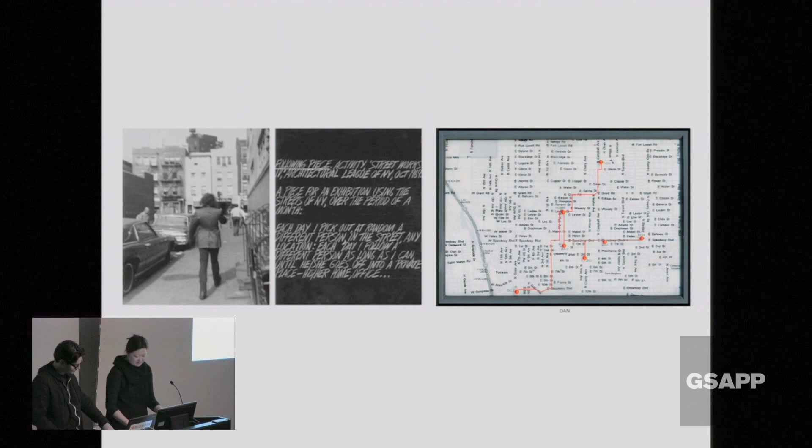One of our favorite pieces is Following Piece by Vito Acconci. In this piece, it's a conceptual art piece where he simply remaps the city by a set of instructions which designate that you should follow a stranger in public space until they enter a private space. This performance is repeated, and it's done in a way which remaps the city and brings to one's attention these limits between public and private. So we're going to show a few really old projects and then some recent projects.

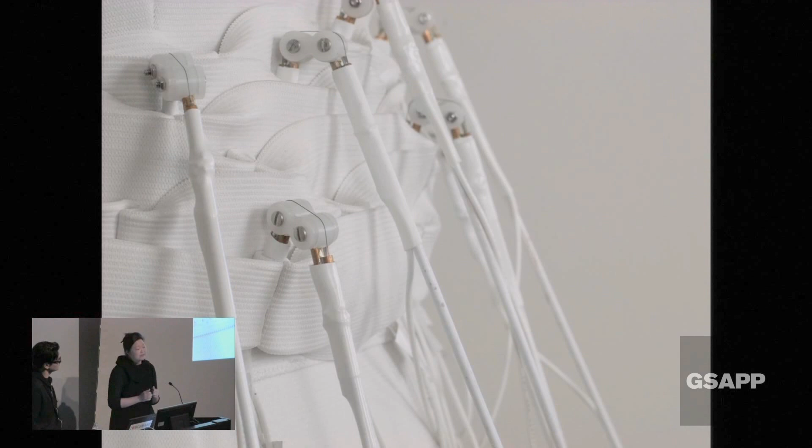The first one is called The Defensible Dress. When I arrived at MIT in 2001 to teach, I was very nervous because MIT has this T, technology, in its name, and I'm very technophobic, a little technophilic, but mostly technophobic. So when I arrived there, I took a course called How to Make Almost Anything, taught at the Media Lab. My final project for the course was this hacked together garment, which you could program your comfort level in terms of personal space distance, and whenever anyone intruded on that space, it would lift up. The medium by which this happened was through soldering and sewing, and I used shape memory alloys, nitinol wires at the time, which when given electric charge and heated, created a contraction, which then created that lever action.

This idea of the public and personal response to space led to, and that technological experiment led to, a project in 2004 called White Noise, White Light. The project was very simple, like the Defensible Dress. The idea was to simply create a field that would respond to the movement of people through that field. It would be indexical, it would emit white light, it would brighten, and white noise. For me, the notion of white was really important in that it dealt with the accumulation of the crowd, accumulation of all colors in spectrum, and all sound within the range of human hearing.

Which you can't hear.

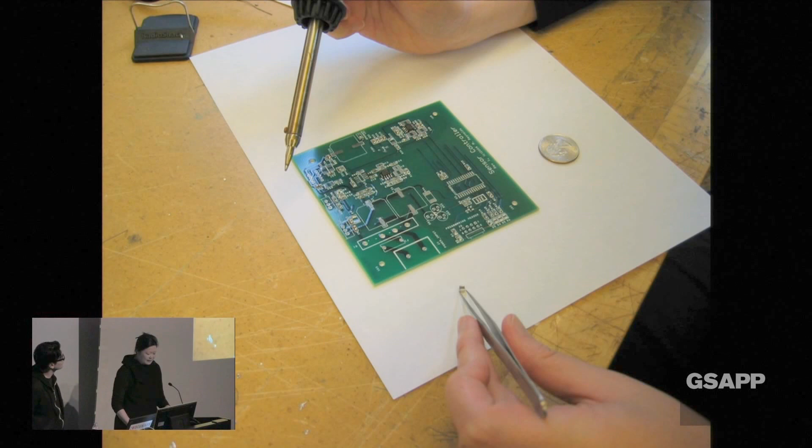Back then, in 2004, we had to solder everything by hand. We were our own sweatshop at the time, putting together 400 of these units, one by one. What was so interesting is that a year later, the Arduino board came out and it was game over, launching this incredible maker culture that we have seen for a decade since.

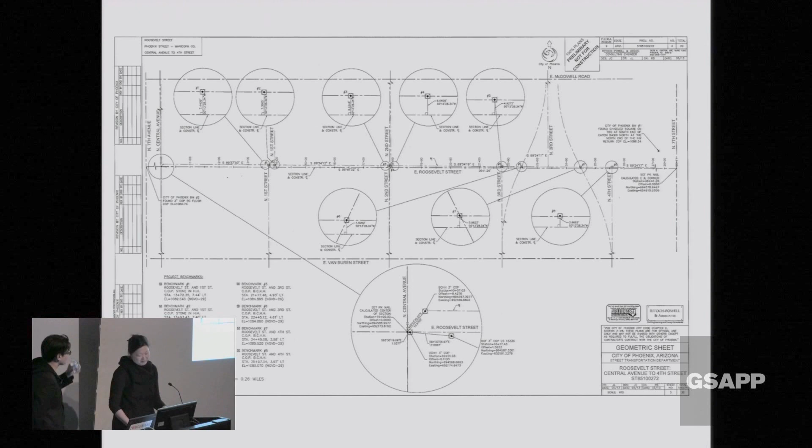In thinking about public space, I think it's always very context specific. We were given an opportunity as part of a transportation project, a Percent for Art program tied to a transportation project in Phoenix, Arizona, where there was a plan to shrink the road and make Phoenix more pedestrian-friendly by adding bike lanes and public space. What was really interesting was we were asked to transform a traffic median into a kind of public space in the context of Phoenix, Arizona, which is a very challenging problem.

But I remembered seeing photographs of this giant flag in Mexico City and how amazing it was that everybody lined up in the line of the shadow of the flag. It seemed that in the context of Phoenix, maybe the most appropriate way, or the most potentially successful way, to create public space might simply be to create shade.

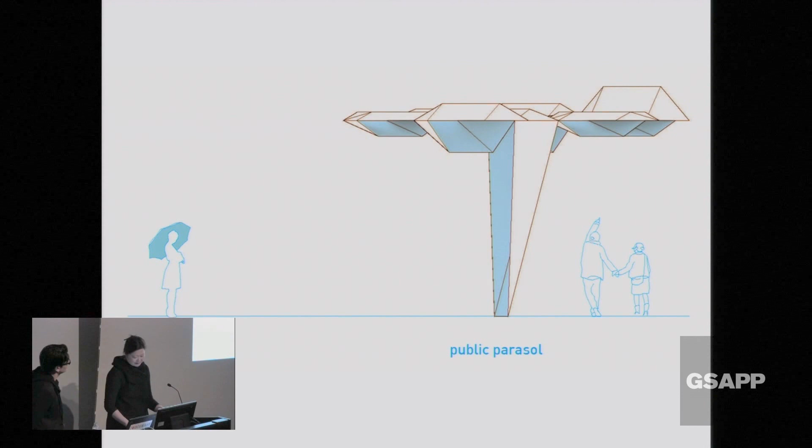So the idea was to take this notion of a private parasol and turn it into a public parasol. The unit was really simple - just a strip folded in on itself like a Mobius strip. But what was important about the unit was that it would create shade, but also shadow, and that the shadow could frame light as it poured through the cell at different times of the day. So it would be a kind of porous shade structure aggregated together.

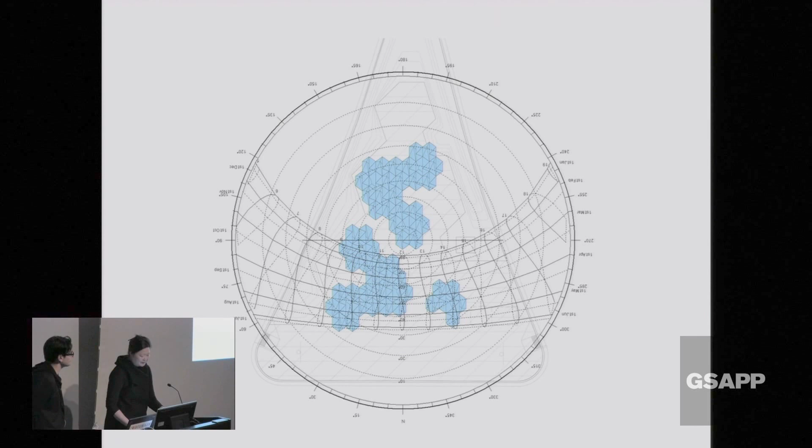The other thing that was critical to it was that it would be responsive to the environment, specifically in the longitude and latitude in which it was sited. So in really hot parts of the day, it's more in shade, and in the cooler parts of the day, there's more dappled light.

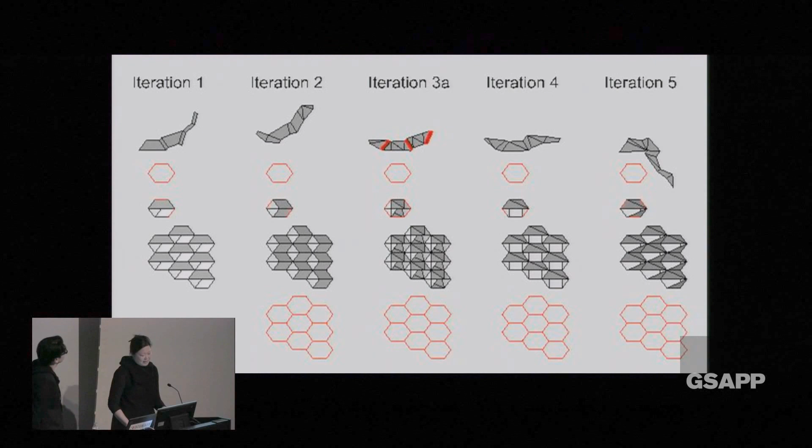And then, of course, the process of iterating between material efficiency and structural efficiency as well, trying to find the right geometry and unit to reduce the tonnage of steel, because we were originally over budget, and we had to find ways to reduce the steel almost 50% in tonnage.

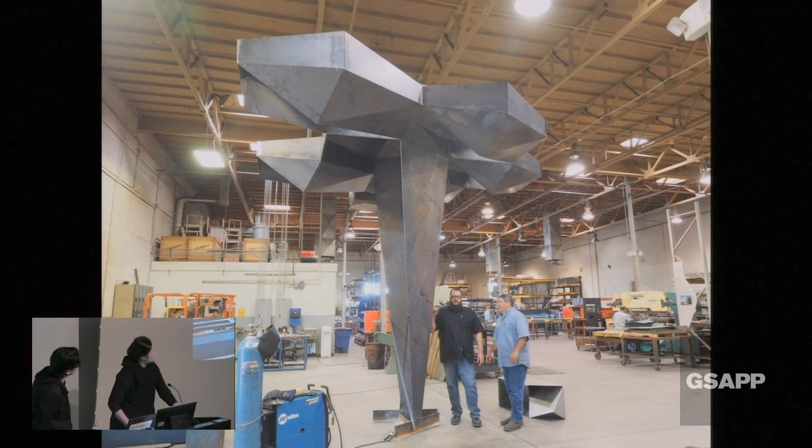So this is our fabricator in Phoenix doing our first mock-up. And then we recently opened it to the public this summer, on one of the hottest days of the Phoenix summer. The top has a few solar panels so that it can light at night and attract the public in the cooler hours of the evening.

And one thing that's important about public works is when you turn it over, you completely turn it over. And despite everything you can try to do, there's always people who use your public space in the way they want to - which is this skateboarder here, which we like, but of course the city has reservations about using public art for recreational activities.

So shifting gears a little bit, we talk about defining discrete boundaries between public and private. A private house is one of the clearest inscriptions of a public and private realm. But we were asked to do a house, and the thing that was most striking about it was this view, the view beyond the house, the view through the house. Our thought was maybe we should just frame that view, and that would be enough, or at least not prevent that.

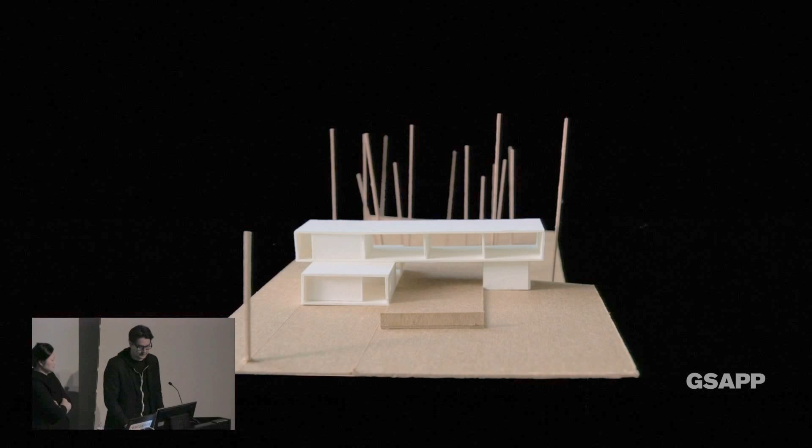So we imagined a house for 3 generations that would consist of 4 windows or 4 rooms, looking at the landscape beyond. The first little study model showed a house perched on this slope with a very defined zone running through the middle, and that was meant to be a kind of public zone that would run right through to preserve that view, that approach right through the house, right past it into that private panorama.

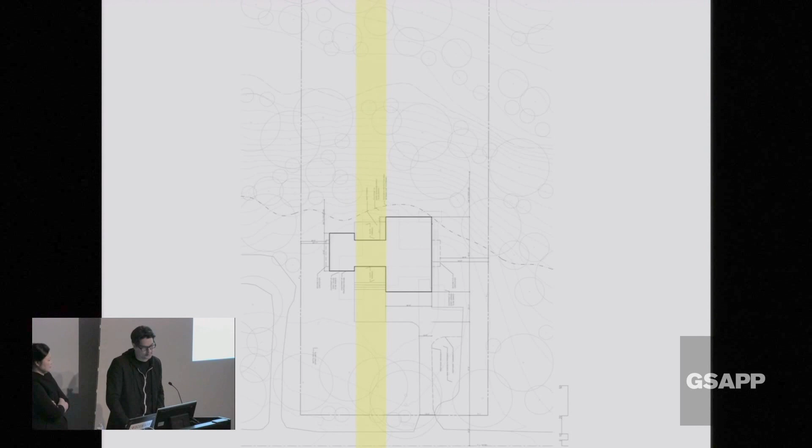So the first sketches - this was actually done in 2005, and the house went on hold in 2008, and it came back in 2012 or so. But the form stayed the same. It's 2 volumes: master bedroom on the left, 3-car garage, and family and living room on the right, with that zone down the middle, which is open, a space of display, a space of view. It's a view corridor. Our client restarted the project and tore down the house, and then he called us and said, 'We're starting again.'

There he is, Mr. Chung. And he took on this project on his own. He became his own general contractor, which is quite an interesting process to go through, because we then became cast as assistants to the general contractor who didn't know how to build a house.

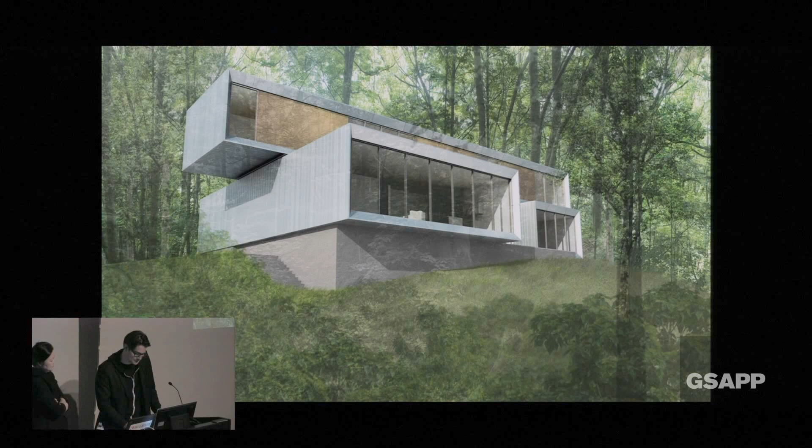So these were the early renderings in 2005. We did manage to get it going - very simple wood framing with only a few pieces of steel to make it affordable. And then a few key details.

If the house is simply 3 volumes, one stacked on the other 2, then the articulation of those volumes became important. And we really wanted the volumes to conceal their dimension with a kind of knife-edge detail, which would actually shade in the summer and allow light in the winter.

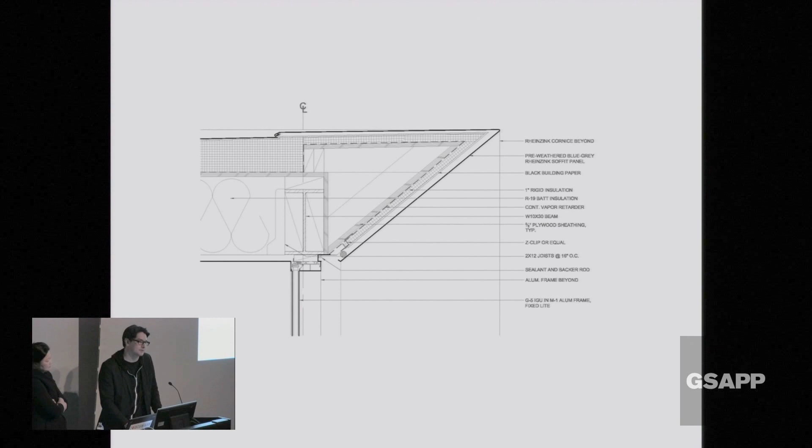And because he was his own contractor, we were able to source things in creative ways that a more conventional contractor would have said no to. So we were able to convince him to do this knife-edge detail, which creates a kind of surprising condition as you move around the house.

You're not sure how big it is, how thick it is, or what it's made of. And we also found a subcontractor who was willing to break anodized aluminum to create a custom facade, a kind of rain screen condition that we were able to install for a reasonable budget. But the most impressive thing about the house is the view out - simply framing that view, actually most impressive without the glazing.

Our objective was not to screw that up. So we tried to build a house in such a way that the view was the dominant condition. At the end of the day, we managed to build the house a little bit over budget, but still at an extremely affordable price for a guy who, at the outset, didn't have any architectural ambitions. He simply wanted something maintenance-free. So we pitched it, and we actually helped him a lot to get it done.

We managed to preserve that one thing, which was that when you approach the house, you should look at the buildings on both sides. There's a McMansion on the left, there's a McMansion on the right, and all of a sudden there's this incredible sort of viewfinder of a house that preserves that view right through it, giving anyone who drives by a fleeting glimpse right through the house and back out through the woods.

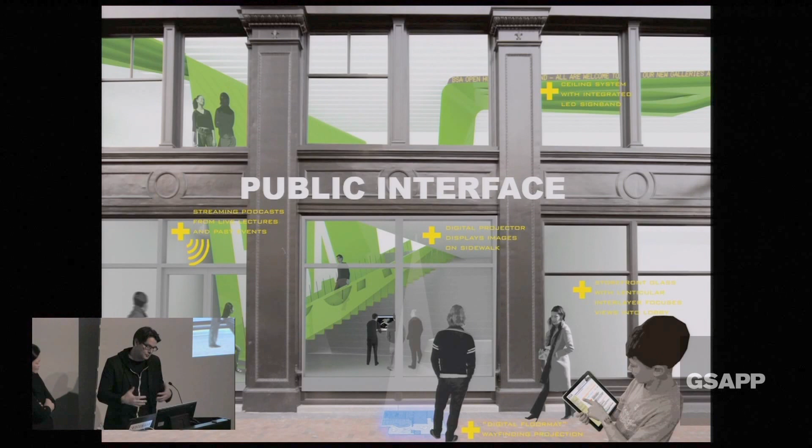A couple years ago, we also did a project for the Boston Society of Architects, which was a competition. They asked for some way that this private institution for architects could open up to the public. That was a real challenge because their space was all on the second floor, and the project was meant to be an interiors project. So we said, how do we make a public interface if we're only doing an interior and it's all on the second floor? So, highly inaccessible.

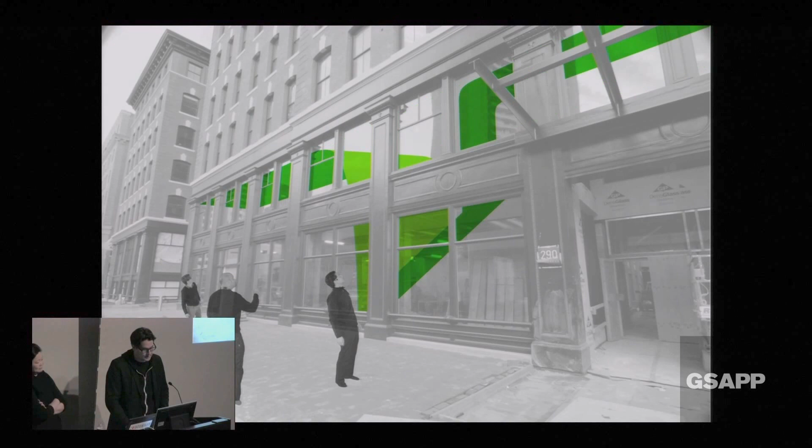Our first idea was, well, maybe we should do something bright on the ceiling so that the ceiling becomes a kind of facade from the street. And if that ceiling comes down to the ground and becomes, in a way, the signage, then that's the way people will pay attention to this thing.

It was a competition we entered, we won, and we managed to execute. The stair became the means of access, but also its main billboard and main facade, and it became, in a way, the ceiling. So that was the big move, this kind of figural stair, which we proposed in the rendering to have no material, no thickness.

In reality, it's a 3/4 inch steel plate that's been welded and ground. We couldn't find anyone in Boston to build it, so they built it in Michigan and drove it to Boston, and they just put it through the window like a ship in a bottle. It went in in a day, they just put it in there and bolted it together, with really tight clearances.

It was 13 tons of steel that fit in there. You can see the crane doesn't have anywhere to go - it's tied up against the beam, it's up against the column. It's a miracle it fit. We were surprised.

There it is, it's the main figure in the space. And for the Boston Society of Architects, remember, this is a membership organization with 4,000 architects. So we have 4,000 architects as our clients, and they have lots of ideas - they're like, well, maybe you should make it green, maybe it should be blue, who knows? It did sort of function, and it was beautiful the way it went in.

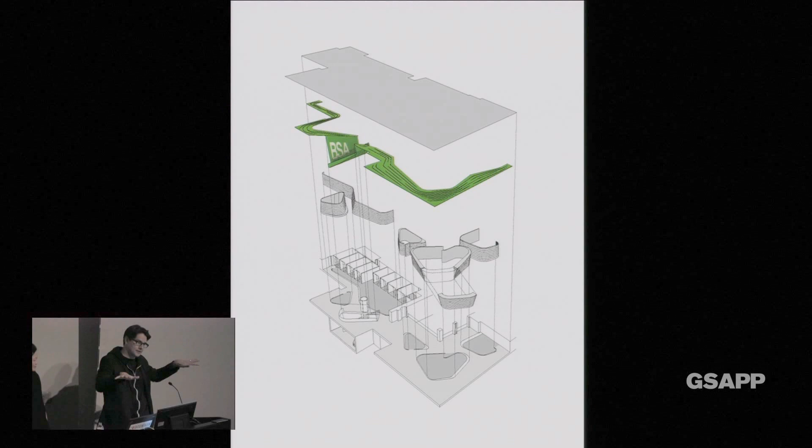Upstairs, the stair goes up, and it folds over and sort of spreads out as a ceiling, and that ceiling defines the gallery spaces. We thought it was important that the galleries occupy the edge, and that people coming to see something in the gallery would actually run into people that were in the meeting spaces. So it was a question of mixing audiences as well.

We found the only thing to exhibit that actually matched the stair here. So here's the stair coming up. It folds over, becomes a desk for working, and becomes a ceiling in the gallery.

This distributes people in the space, allowing them from the gallery to look out at the city. That was important, that the Boston Society of Architects wants to put on display the kind of paraphernalia of design, that in the gallery you could see the city outside and see the way the city's made on the inside. So it was an argument about putting that on display.

At the end of the day, it sort of works. From the street you look up, you see all this activity, you see light, the color, which we had in the renderings and somehow just stuck. It is what attracts you to the space, and it is what makes you want to go up there and discover what's going on.

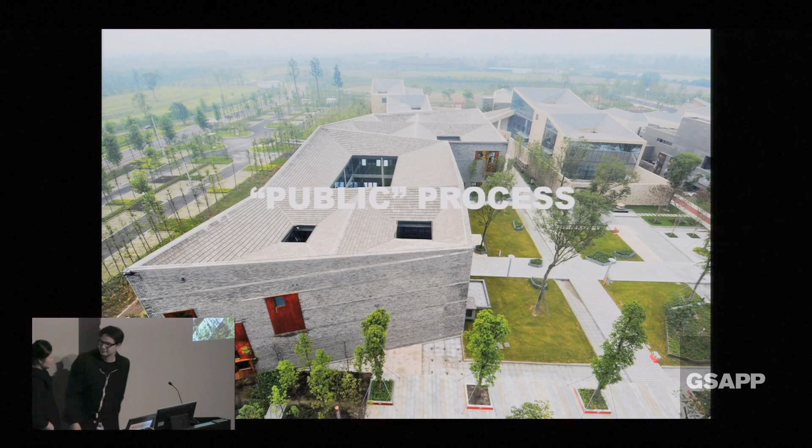Another public project we did, which public is in quotes because it's not really clear if it's public, but it's a project that we got out of the blue, and it happened right after the Chengdu or the Sichuan earthquake, and our client was in Chengdu at the time.

And we received an email, and the email was very opaque, and it had this attachment with it. I don't know, many of you might be getting emails from China, but we tend not to believe these are real. So the email essentially said, 'Dear architect, we're looking for an architect, and you'll be part of this group. You'll be one of 7 architects to design a clubhouse.' And we simply didn't respond.

But it happened 3 more times. They sent the email, and finally we got a phone call, and we realized that it was probably real. We were told that we've been assigned Site G, which is this very odd site, and we looked at the site plan. We thought it was an isometric, but it turns out it's a plan. It's not an isometric.

But the project came with a few rules or requirements. One was that the client was very insistent that the project be based on a traditional courtyard house typology, that it deal with traditional materials, local materials on site, that we had to do a sloped roof, and the design had to speak to a poem by Li Bai about

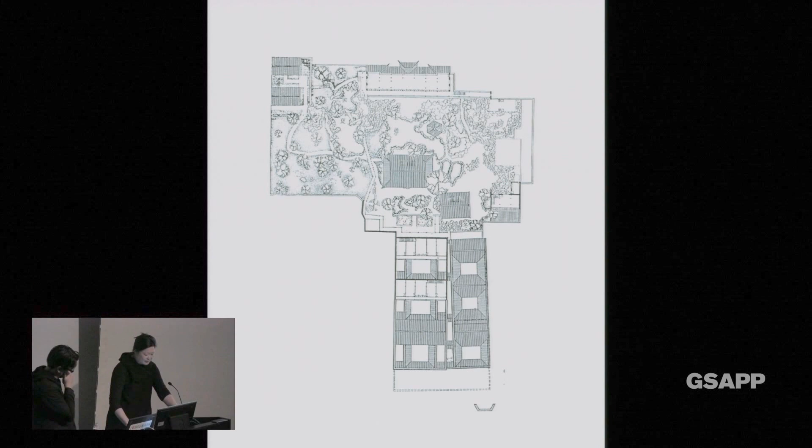ascending a mountain. So again, we thought this was very curious, and we dutifully looked at a lot of courtyard house typologies, and we couldn't get our head around actually doing a sloped roof. So we did sloped walls, and we thought maybe that could count as a sloped roof. But the idea became about simply packing a series of cellular spaces together into a kind of courtyard mat building typology.

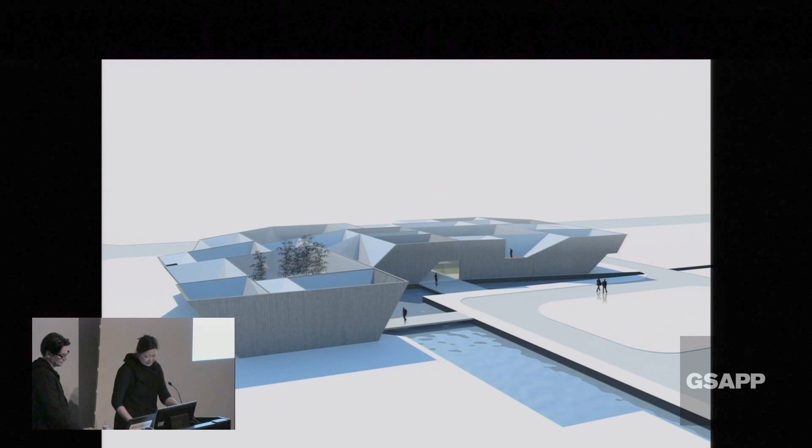And creating a real variety of kinds of spaces within the clubhouse. So we went to China and we presented, and we realized that all the other architects, who were from different areas in China, were also having fun.

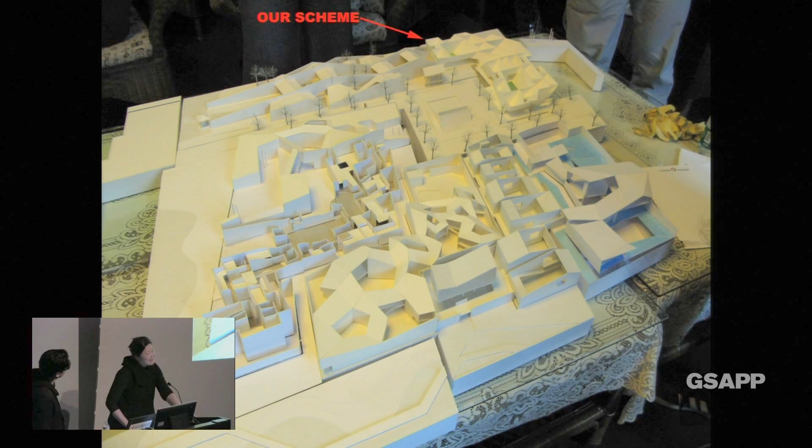And we got a really big scolding by the client, we were lucky. Instead of firing all of us on the spot, he actually sent us to the Suzhou Gardens. And he kept emphasizing that he was looking for something contemporary, but with real traditional Chineseness. He kept using that term, Chineseness, and we weren't quite sure exactly what he meant, but we dutifully went to the Suzhou Gardens. He sent us to the Emei Mountains.

Eric woke up at 5 o'clock and experienced ascending the mountain. So we tried to redo the project in a more simplified way that tried to absorb some of the lessons learned by experiencing these places. And it's true, architecture can only be learned through the experience of inhabiting that architecture.

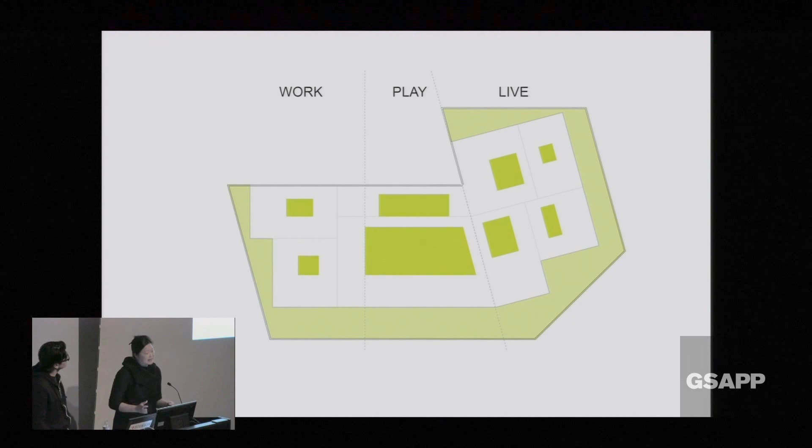So the program was more simply organized into work, play, and live. Each zone had different scale courtyards at the center of each of those cells. They were packed together and adjusted to that very, very awkward geometry that we were given in terms of the site plan.

And then we dutifully, we were told we passed, great, and we dutifully did our construction documents and sent them off. And we didn't hear anything for many, many months, so we assumed, well, okay, that was that. Nice portfolio project. But then we got an email with an attachment that said, congratulations, the project is under construction.

And just a few things to note: that we actually changed the site in the last few months. And we took your plans and we've mirrored your building and adjusted them to the new site. And we think it works. Could you please modify all your documents so that we can move forward? Because we've already cast the whole basement level for all the parking across the whole site.

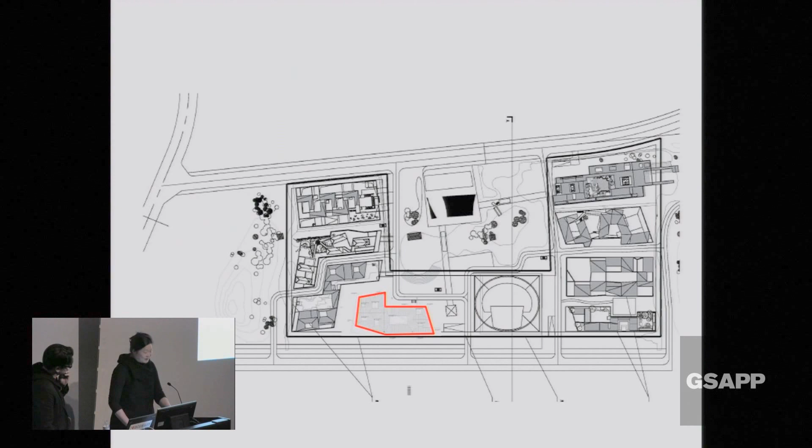So there was our new site. So we said, sure. And in fact, we were really happy because the new site was better, and the geometry could be more simplified. And in fact, he also changed the program, so it went from a clubhouse to like a mega restaurant complex to finally an exhibition hall. And the circulation really worked well for that.

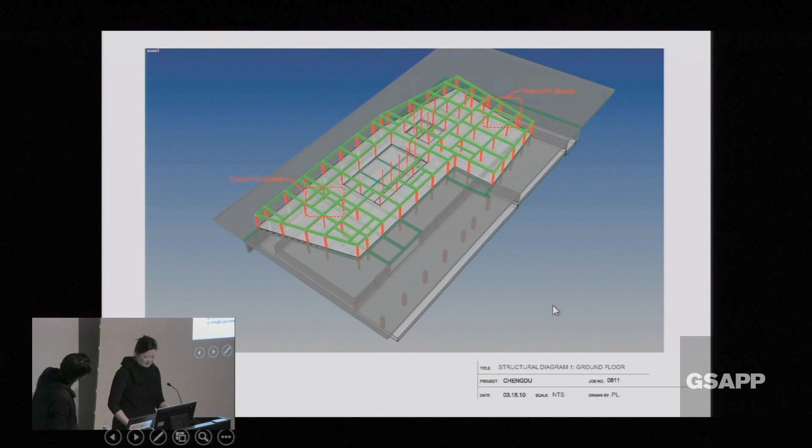But the interesting thing is there was no time to actually redo the construction documents. So what we did was we simply built, a few days ahead of them, our Rhino model. Literally, it was a Rhino model. We were just building all the beams and all the columns, alerting to them where the transfer beams should be. And we would send these every night, and they would literally build during the day.

So the developer for this project had his own in-house structural engineering team and construction company, and so we were able to work this way without the documents. And the project was built.

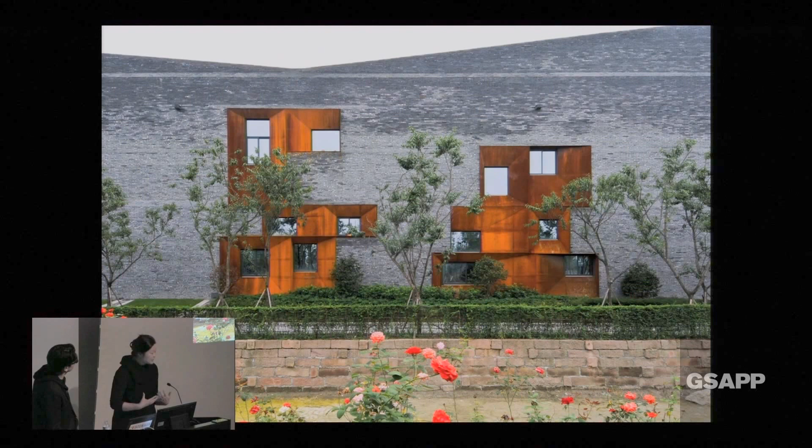And one of the other interesting rules that we had been given was that we had to use small operable windows. And this building is 60,000 square feet. It's enormous. But then we were limited in terms of the window scale. So we introduced these giant window surrounds to modify or mediate the scale between the operable window and then the kind of big brick facades.

And these were kind of modeled and sent as sketches daily back and forth during the construction process. And the material is local gray brick, and you can see the color changes as the brick goes up, and that was not intentional. What happened was it's just such an enormous quantity of brick that as they were producing brick, the color just changed in the local factory over time, and so you're just seeing the darker shade as you move up.

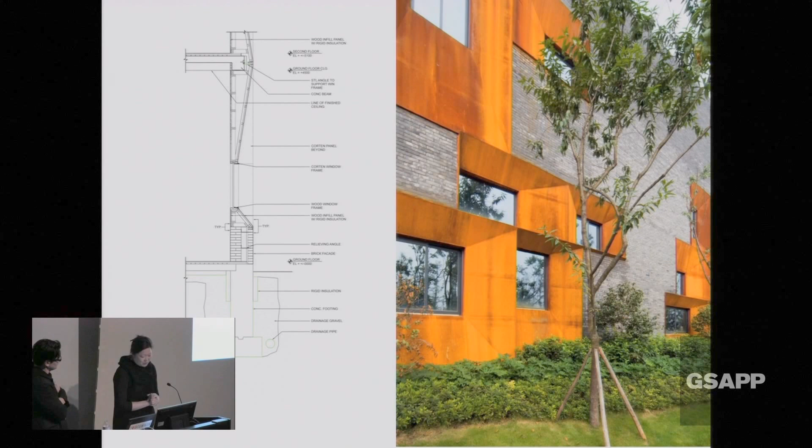So the building actually has a quite significant perimeter, and we wanted to create a lot of variation. The other thing that also happened is we originally designed these window surrounds in wood, but it turned out wood was too expensive, and so the client suggested the substitution of Corten steel. So we said sure, and it turned out quite well.

And the last thing we were able to introduce was a simple tectonic idea. If we were going to use brick, we thought there should be a simple rule since following construction documents would probably be a challenge. So the rule was simply to be true to one's orientation. If you're a brick, what do you want to be? I want to be truly north-south or east-west. So all the bricks, even though the building has angles, are all true north-south or east-west, which creates the kind of variation in all the angled parts of the building. So when you walk around it, you can see this different texture, but also this notion of orientation and where those angled walls happen.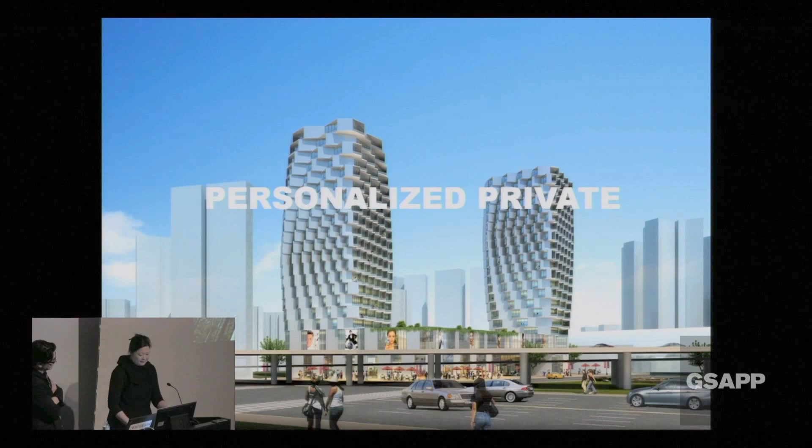So we did build that project. We did eventually get paid, and the same local architect invited us to do a competition for some high-rise residential buildings.

High-rise residential buildings in Shanghai—imagine there's an incredible market for different kinds of residential buildings, and every building is trying hard to differentiate itself. We thought it might be interesting, instead of trying to differentiate the overall form, we could differentiate the units.

And so the building has a high density of units in the middle, and it decreases as you go up. So the penthouses are the big ones at the top.

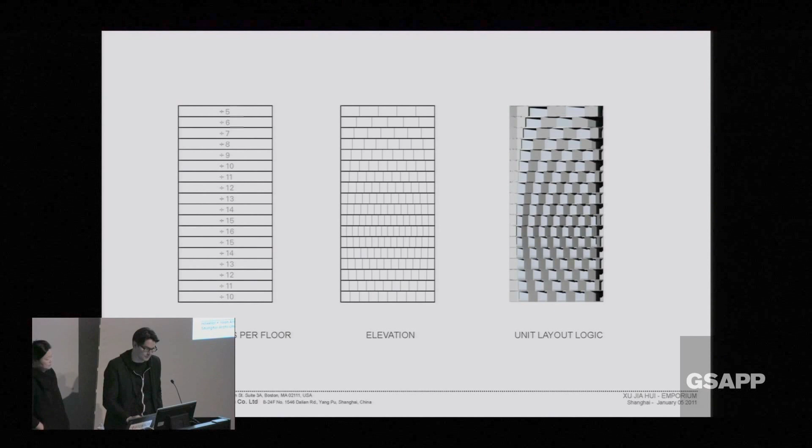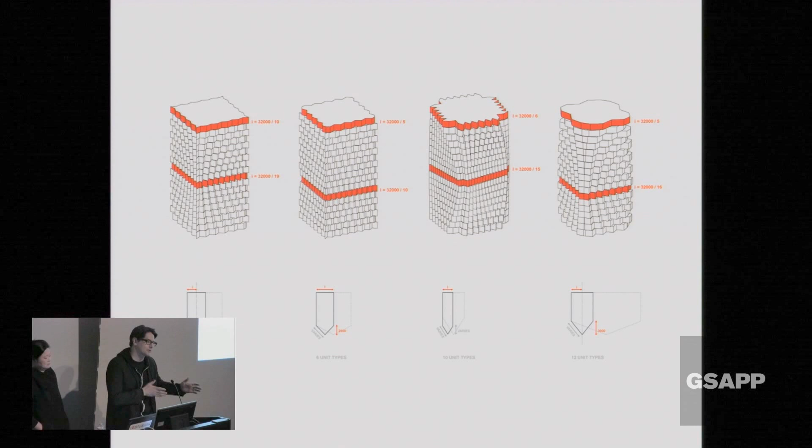And this simple logic, we tried a few different versions, just scripting it in different ways, but it seemed to produce these bizarre optical effects. We got weird curvatures and weird twisting simply by rearranging the units and justifying them to the left or to the right.

It seemed like a simple rule about the balcony might actually end up shaping the overall building. So rather than post-rationalize or somehow cut and carve the building like so many of the expressive forms in Shanghai, we articulated the unit itself, and that produced, as a consequence of its organization, a three-dimensional form that was kind of ugly, but actually had a certain amount of appeal because it was self-generated.

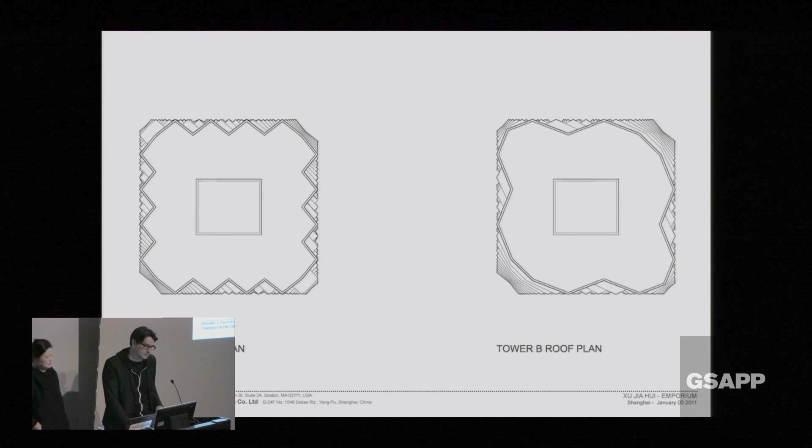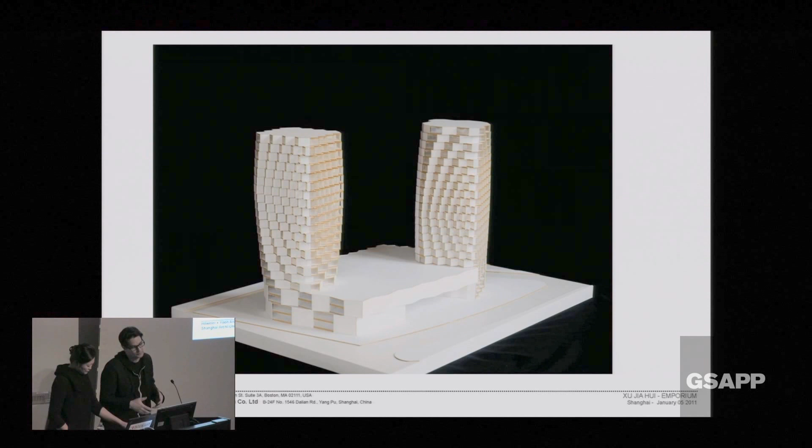So the floor plates are all different. As you move up—we were given the core, so we were just working on the perimeter. The idea was each unit had a balcony, and each balcony had one blinder, and their misalignment between floors produced these bizarre curvatures, these bizarre optical effects, which we actually thought was refreshing, that the building would be formed by an internal organization logic.

So these are the competition models. We sent them off. Again, it was like, well, when's the meeting? We don't know. When's the meeting? We don't know. When's the meeting? It's in 12 hours. So we missed the presentation.

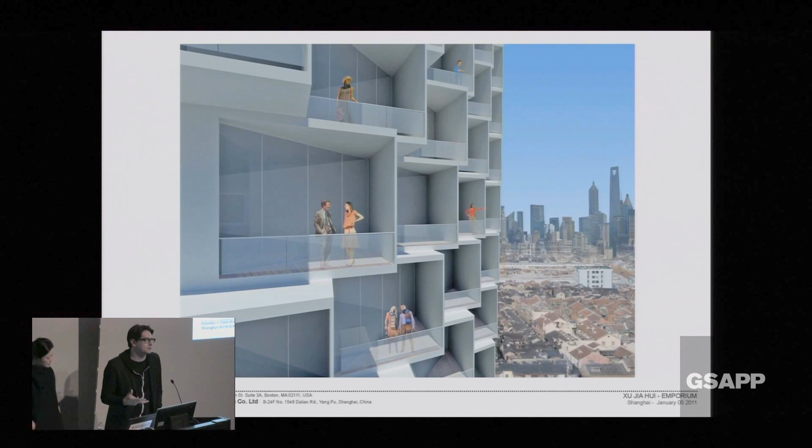We didn't win the project, but we felt it was such a strong idea that it somehow helped us rethink the idea of big buildings by thinking about them part to whole, sort of inside out. So that was a kind of learning process for us.

I'm going to do this one. Okay. Meejin referred to different kinds of projects.

I mean, we wanted to show a range—bricks and lighting. And lights. We were invited to do a project at the Mexico-U.S. border in San Ysidro.

And the GSA, the General Services Administration, is the U.S. government—probably the biggest client you would ever work for. They were commissioning a new border crossing. Apparently, this is the most active border crossing between the U.S. and Mexico. It can take 6 hours to cross.

A lot of people actually cross once a day because they live in Mexico, they work in the States, and so they come across this border all the time. So I think they've got about 14 lanes currently, up to a 6-hour delay. So the U.S. government is rebuilding this with 24 lanes.

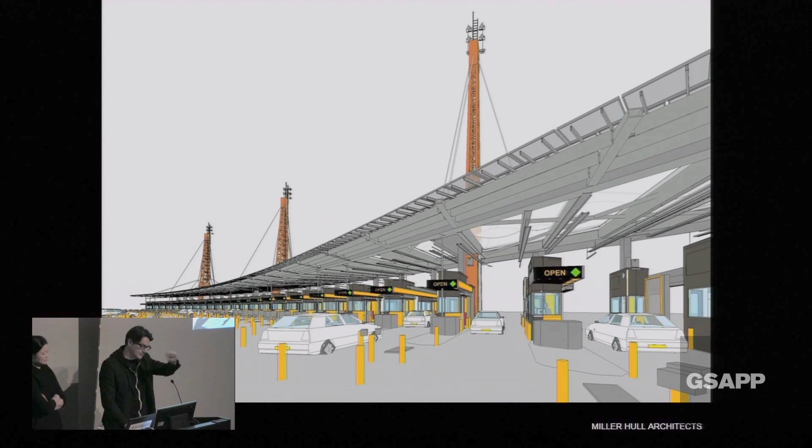And we were given this rendering—this was not by us. And they said, it's a canopy, we'd like you to do something site-specific. And so we said, maybe we'll just put an edge on that canopy. We'll make a screen that's 1 pixel high and 600 feet long.

And the idea is every time a car goes through, we'll see a kind of burst of light. Maybe we can design a light pattern such that as people are waiting to cross the border, there's some signal, some broadcast that says, yeah, the border is porous, there's movement, people are coming across. Something that seems so simple actually totally changes the experience of waiting for the border.

So we worked with computer programmers, lighting designers, to think about how we could transform such a mundane boundary condition into something that might create a kind of broadcast system, a signalization that says, without language, we're open, you're welcome, please come through.

And this is particularly poignant today when we think about the rhetoric of borders. There's this idea that we need to wall it all off, and there's a kind of hysteria around this. But I think this modest project, 1 pixel high and 600 feet long, talks about a condition without using language, without words, but simply says movement is happening. And look at it—see how the lived reality is different from the rhetoric we hear in the news all the time.

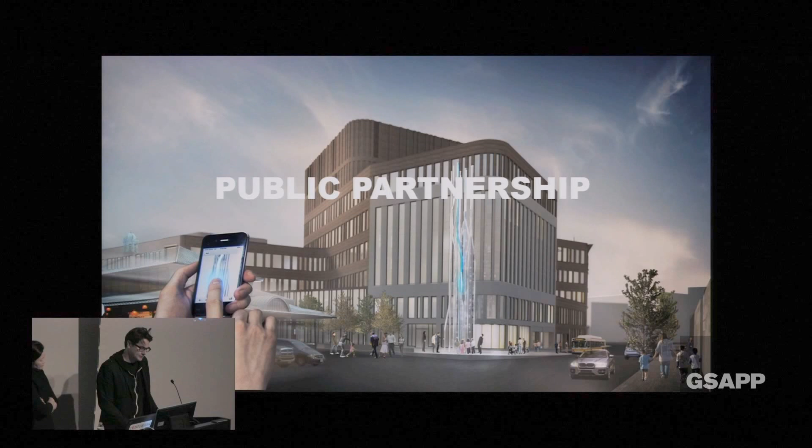I'll keep going. We're interested in these broadcast mechanisms, how architecture functions as a kind of low definition signal. We did a small competition in Boston. There's a new government building in the background, and the idea was to create a sculpture there that could be a kind of information sculpture, a signal spire. We asked how we could think about this as a map of the city of Boston, how a bundled structure could convey the idea that there are 21 neighborhoods working together structurally, and how we could map some phenomena in this sculpture.

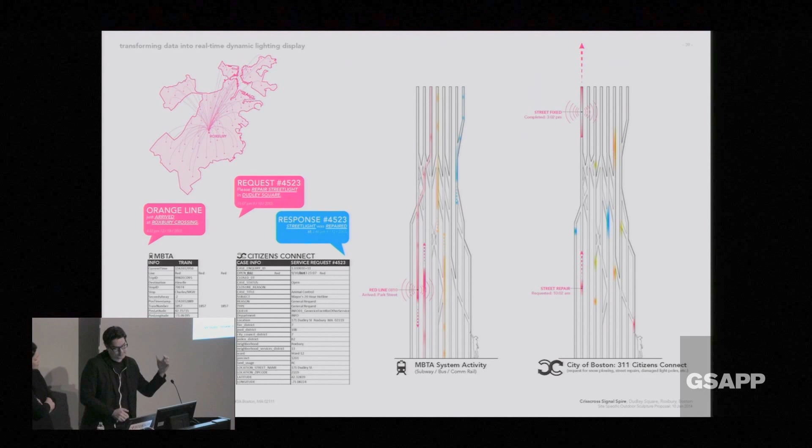Boston has this app on your phone, so if you see something you can take a picture of it and report it to the city. It's called 311 - if you see something, say something. Take a picture of this dangerous hydrant condition, report it to the city of Boston. It gets logged, it's geotagged, and presumably they fix it and put this thing around it. But this idea that there's this data source out there constantly being updated - it's a very high quality, site specific data source about the kind of violation or condition. You can also say nice work cleaning up the garbage, or negative things, or positive things.

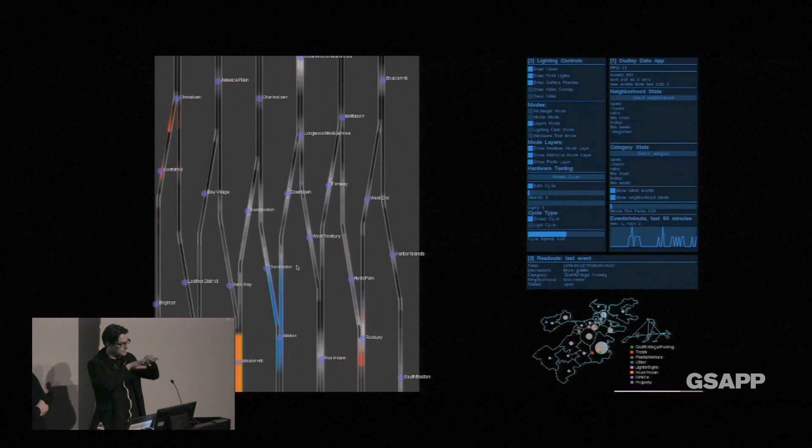We took this data set and said maybe we could map that into the sculpture if we unroll the sculpture. So we understand the sculpture as a kind of model of the city, and then working to three-dimensionalize that data, we can create a kind of broadcast of the different events. Each event represents some citizen communicating something to the city of Boston. We also, from a fabrication point of view, looked at the forces and stresses in the steel, and created a perforation pattern that mapped the different stresses.

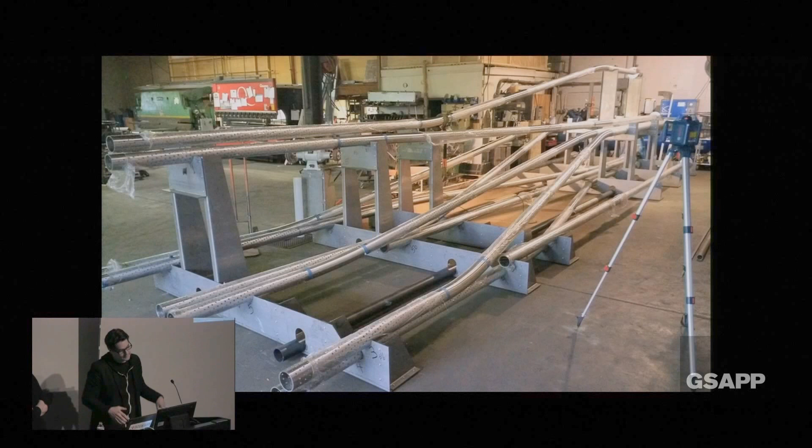We still do a lot of this kind of design-build work, so we assembled these pieces ourselves, brought them to site, and installed them in front of this government building. People walk by and they're like, what is this thing? What does it do? What does it mean? And we say, well, this is an interface - this is citizens interacting with the city. There's a normal mode, like I've logged a request and I'm unhappy with the trash or this pothole. There's another mode - the client insisted there be a kind of jackpot mode so you could control it yourself.

So this is also a kind of cautionary tale. We wanted to make this data visible, but on the other hand, there's such a strong desire to hijack any broadcast medium and turn it into entertainment. So if you go there and do the signal spire hashtag, you'll trigger a site-specific response, which is this jackpot mode. We're still working on that. It's going to open this week, Friday, if you're in Boston. You're invited. There it is.

Okay, one more? Okay.

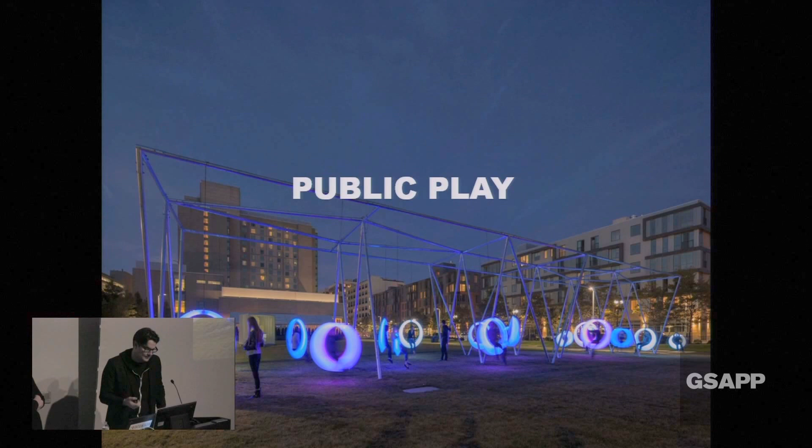Amal mentioned the swings. We were invited by the MCCA, the Massachusetts Convention Center Authority, to help them design a temporary park. This is in Southie, a kind of rough neighborhood. The convention center sits in a kind of wasteland, and they're trying to make a park in the middle of nowhere where there is nobody. So what do we do? We need to bring people here, we need to make it into a place.

So we thought, how do you bring people to a neighborhood? How do you activate a space? How about something playful - this kind of defamiliarized playground equipment, like big swings? The swings are made out of polypropylene, so they're luminous and diffusing. There's an accelerometer in each swing, so as it swings it changes color - blue and pink, blue and pink. Very simple technology, but oversizing it and giving it a little intelligence produces an incredible behavioral shift.

All of a sudden adults are behaving like children, refusing to get off, swinging madly. This is footage that we staged, but the fact is it got completely overrun by people discovering their inner youths.

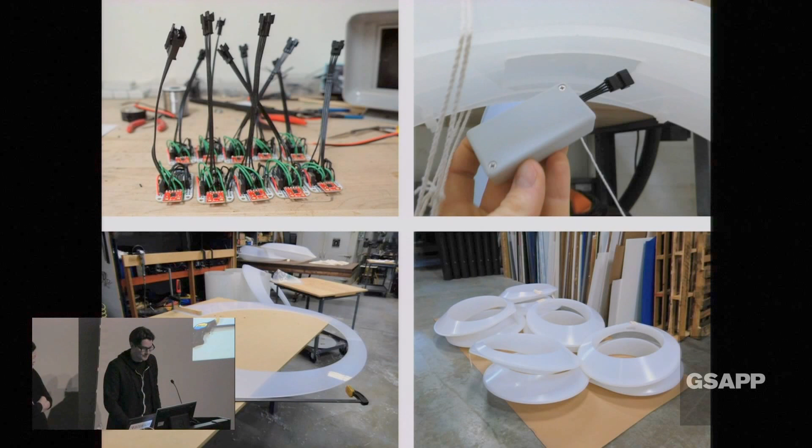And it became such a landmark in the neighborhood. I should also mention there's a bar right next to it. So that's how you make public space. You put a bar next to a swing set, and you invite them to sort of go at it.

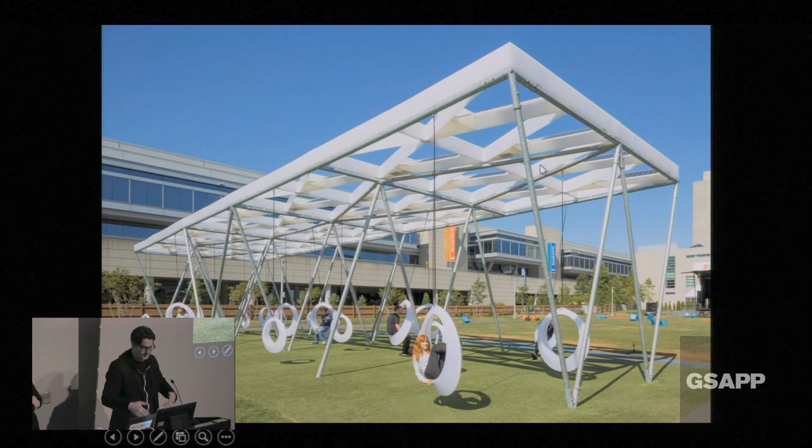So this is us making things. We like to make things, little microcontrollers. This year we decided to put a PV array over the top so you don't need any power, the thing just powers itself. It's a kind of 3D space frame, and the same space frame creates the surfaces that orient towards the sun, so it's all off the grid. This year we made it blue to green.

So it's off-grid, it's playful, and this is what it looks like on any given Friday night or Saturday night. Thousands of people mob it. In the tent is the bar, and they behave in ways you would not imagine.

We said one person at a time, maybe two, no pushing. You can swing like this, don't swing like this, do not swing like this. I found someone swinging underneath this thing, he was hanging like this. So as much as we're interested in behavior, in building behavior and encouraging different kinds of social norms, we're always surprised by how people actually use these things.

This guy, these girls, this guy. Lots of selfies. That's one way to measure success, is how many selfies people take. And, you know, nice things too. Okay, your turn.

Great. So we have two more projects to share. This project kind of walked in the door, and we thought it was a dream project. We were approached by the Circus Conservatory of America, who is planning the first accredited university level, college level circus arts program in the United States.

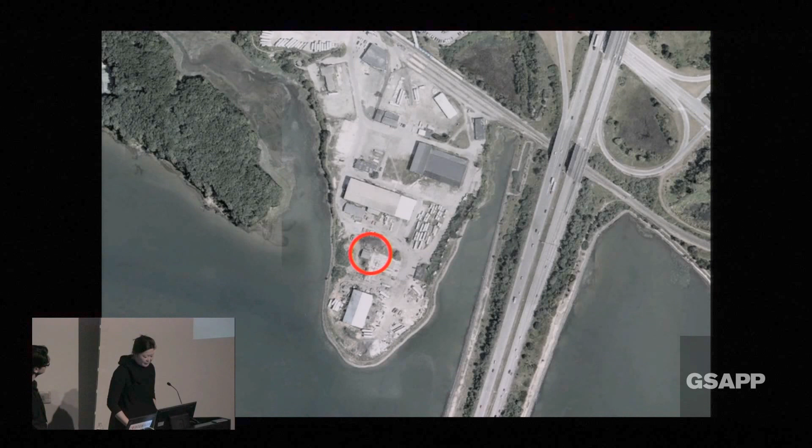The site is Thompson Point, right when you enter Portland, Maine. You can see the site as you're driving across into Portland, and then from the site you're surrounded by water. It's really an amazing site.

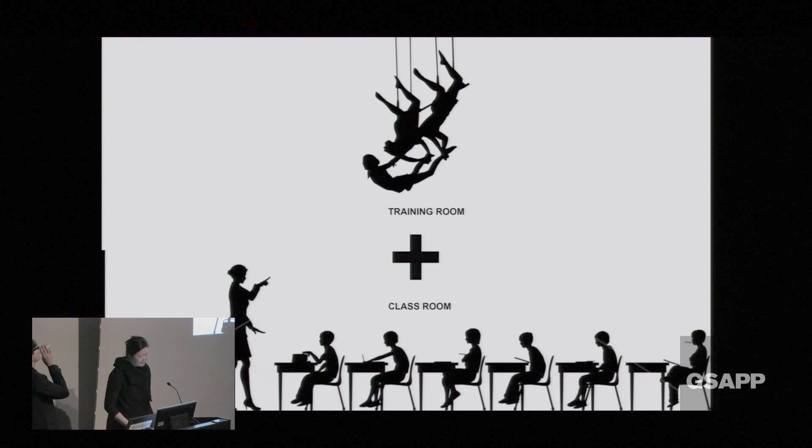The interesting thing about the program is that it's a combination of classrooms, but also training halls. And the training halls are, of course, very large and very specific to the kind of performance arts being practiced.

So the historical circus, what I think is really amazing, because it was nomadic, is very minimal, right? And the circus, or the circle for the circus, makes a lot of sense when you look at it. It's the most compact form to get a lot of views intimately into the center. It has very minimal structure with one pole at the center.

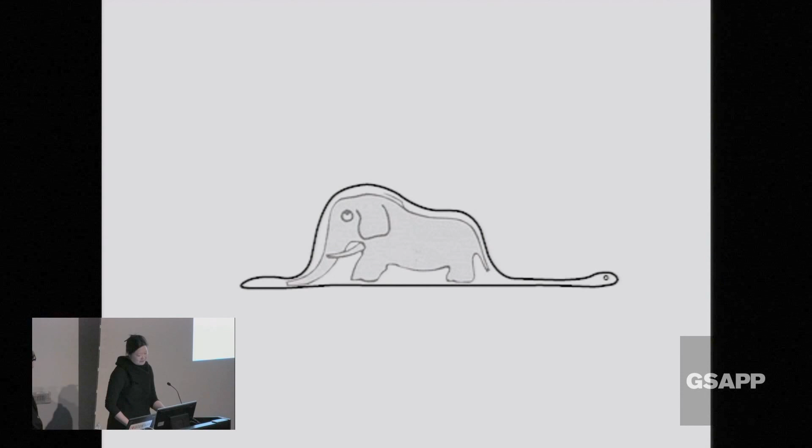So we went through a design process, and this will reveal that sometimes we have no idea what we're doing. We just started iterating with the program and the site requirements, and we struggled a lot initially in terms of finding criteria to evaluate our formal exploration.

And then we took a step back and said, you know, we kept fighting the circle. The client asked us to really consider a circle, and every time we tried it, it just never really seemed to work. We resisted and resisted, and finally we gave in. But we gave in a way that didn't start literally with the form of a circle, but actually took the very clear programmatic volumes and put them in the round to each other.

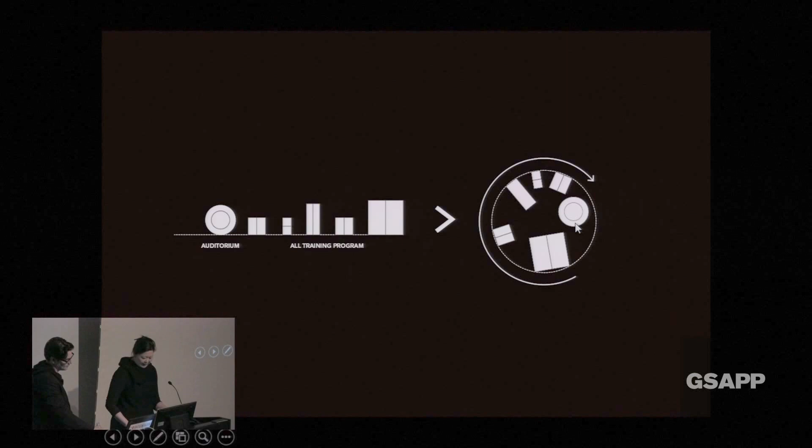With the performance space at the ground level as a 42-foot diameter circle, it arrayed the training halls around the center. It lifted them up, though it left the performance space, the public performance space, at the ground level.

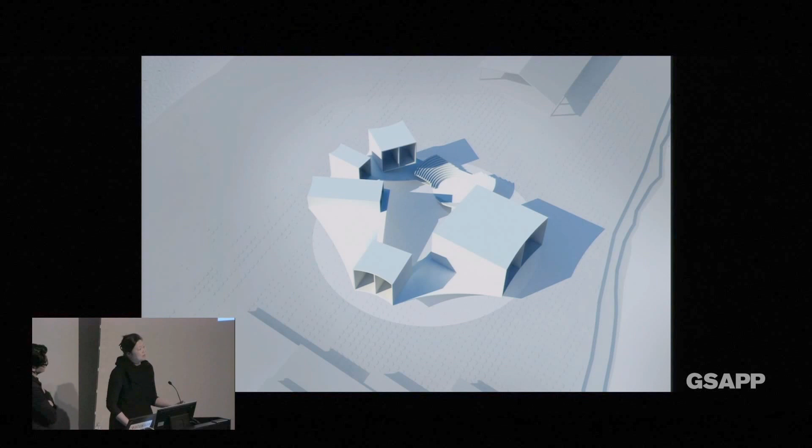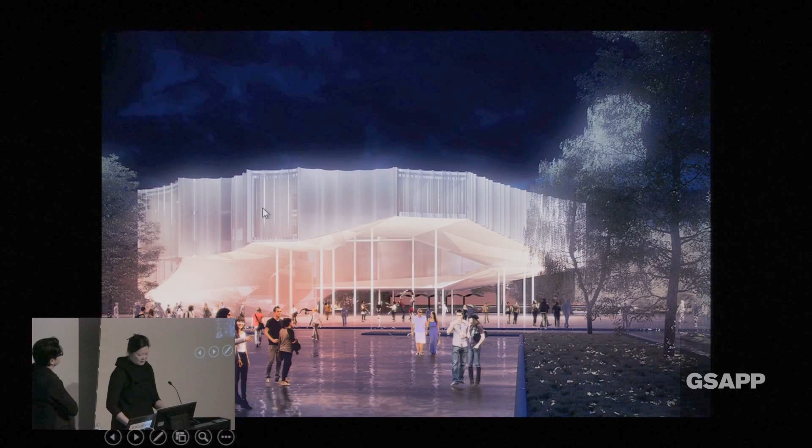So we put those ideas together, and then we connected them with a kind of public social space for the students, because we learned that many of the acts they develop tend to be in the residual spaces that they inhabit. So we connected them through a kind of circulation, and made sure the ground level was always open and accessible to the public, so they could have the ground and their view of the water as well.

The last project I wanted to share—if the circus was a kind of dream project for us, I think this last project was the opposite of a dream project, a project you would never want. It's a project for Sean Collier, his memorial at MIT.

During the Boston Marathon bombings, Boston was really shook hard. But what was also pretty phenomenal was what happened immediately following the bombings: the city voluntarily shut down. I mean, of course it was requested, but it was amazing that the citizens of the city all decided to stay inside during this incredible manhunt for the two brothers.

And shortly thereafter, during the manhunt, a police officer at MIT was shot and killed right on the corner of the site during the brothers' escape. And after that event, there was an incredible outpouring for all the victims, of course in Boston, but also specifically in the MIT community for Officer Sean Collier.

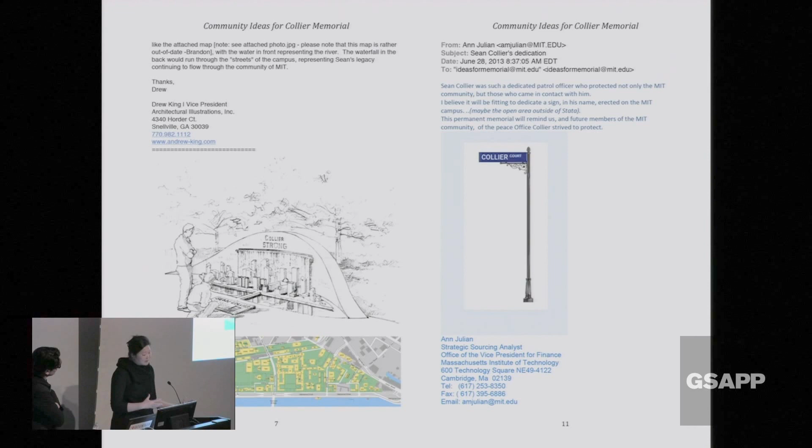MIT did something very MIT, which is it asked the community for suggestions, and then convened a committee to think about how we should memorialize Sean Collier. There were all kinds of ideas from the community, and it brought up the whole issue about memorials and representation, figurative and literal.

The committee concluded it should be a physical memorial, although there was some debate—maybe it should be an ephemeral memorial, or a scholarship. But they really wanted a physical memorial, and they wanted it on the site where he was shot. The conclusion of that committee report recommended that one of their own, someone from MIT, design the memorial, and recommended that I do that.

So when I received the call from the provost, I wasn't sure how to handle it, because of the history of the Vietnam Memorial, and because it's my own campus. I thought it was going to be a very challenging project to do.

But I was encouraged to try, and I was asked to synthesize this 100-page document of all the community ideas for the memorial, and to find a way to create something that was uniquely MIT.

The one thing I could hold on to that was abstract and collective enough was this notion of MIT strong, Boston strong, and 179, his badge number. So this idea of strength, and how to convey strength, became critical to the project.

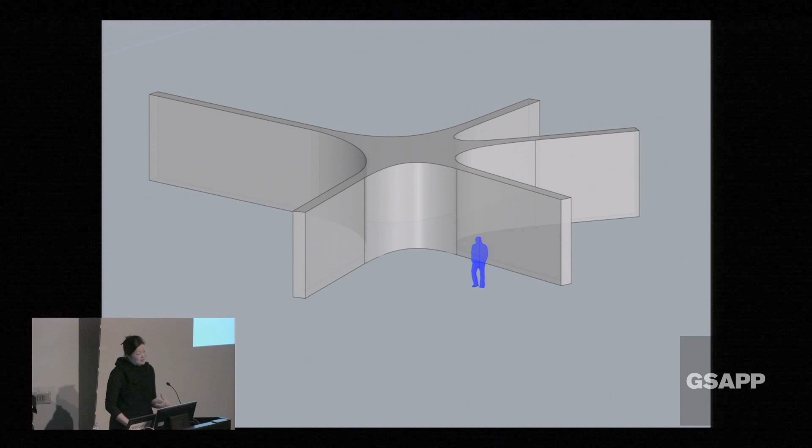So the question was how we could abstract that and use the figure maybe of the star, but do it in a way that could be spatial—not a barrier, but something with a kind of void or absence that was always recognized as part of the form.

The five-pointed figure, you can argue it represents a star. It could also represent a hand, which is part of MIT's motto of mind and hand. But really, it's simply a five-pointed figure that frames the site, that frames very specific views of the site, and creates a space of memory in this kind of void underneath.

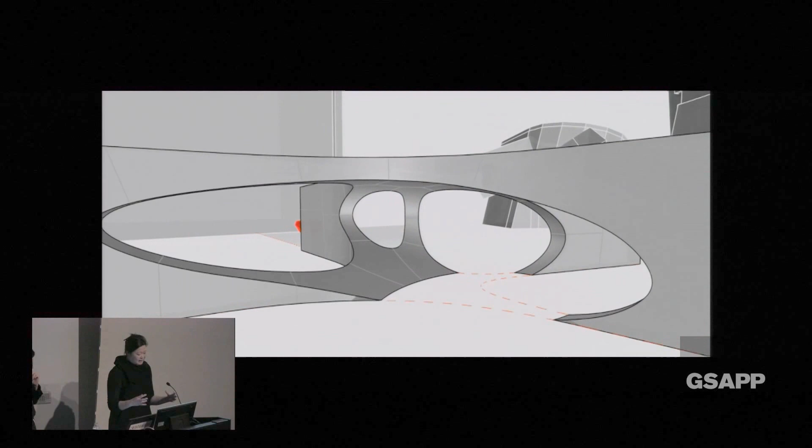And then this is the view to the location where Sean was shot, that red rock that you can see. And then I wanted to be quite literal about this idea of strength.

This Inca wall, which I think is really amazing, where every block is super unique and they each hold each other up. So it was very important that the memorial be a fully compressive structure, and that its geometry and physics essentially made the project strong, that every block supported each other in this configuration.

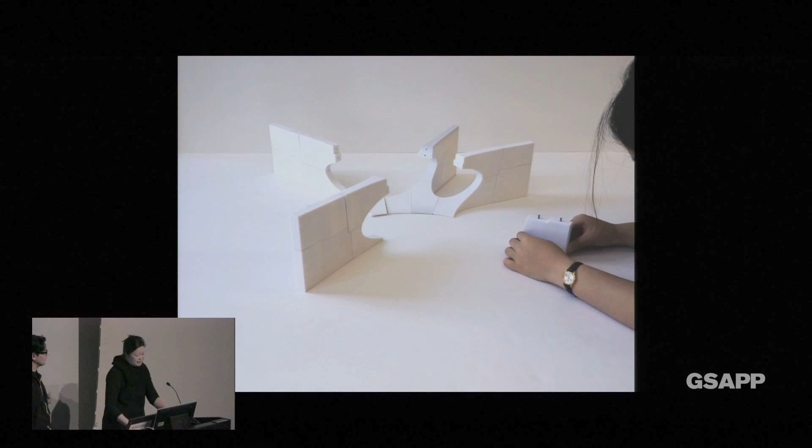Of course, there's a big challenge in building fully compressive structures today. We had many structural engineers on the project. We worked with Knippers Helbig, and we worked also with John Ochsendorf, who's a masonry consultant. And the question was, could you really build a fully compressive masonry structure today?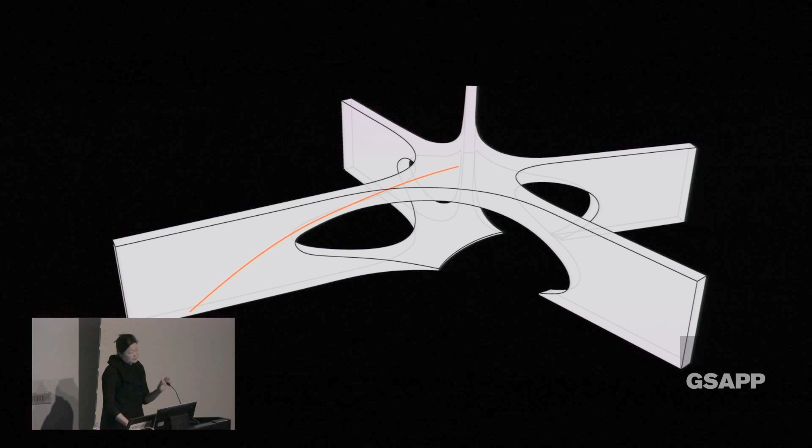Some of the engineers wanted to post-tension it, putting steel cables in it to resolve all the lateral problems. But in the end, we felt that it had to be literally strength through each of those blocks working together. So, simple principles of an arch—it's basically a five-way arch with each arch supporting each other, which is pretty straightforward.

But then we wanted to create this impossibly flat vault underneath. And the forces resolve themselves in this strange pentagon.

So one of the challenges of building this structure is that there's a kind of 1-to-6 ratio. For every movement or deflection, if it moves 1 inch out, it's going to move 6 inches down. So that's that catastrophic red color right there.

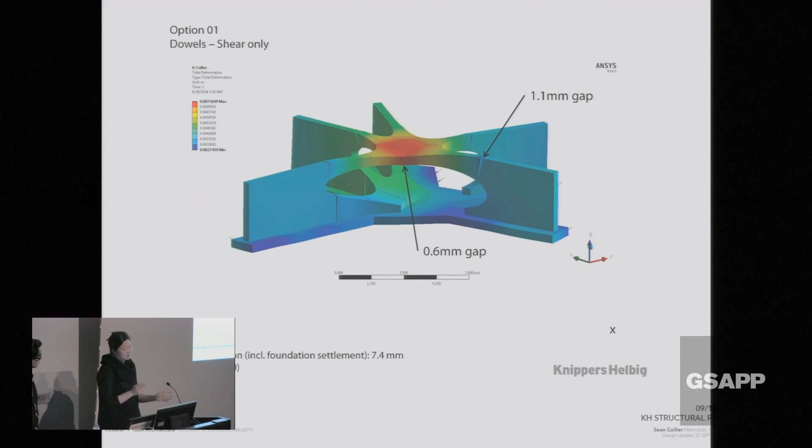In today's building industry, asking masons to meet what we needed in terms of our tolerance criteria—under 3 millimeters total, so basically 1.5 millimeters per block—was a real challenge. But somehow everyone agreed that it was worth the tests and worth going through the process of seeing if we could design and engineer it as a fully compressive structure.

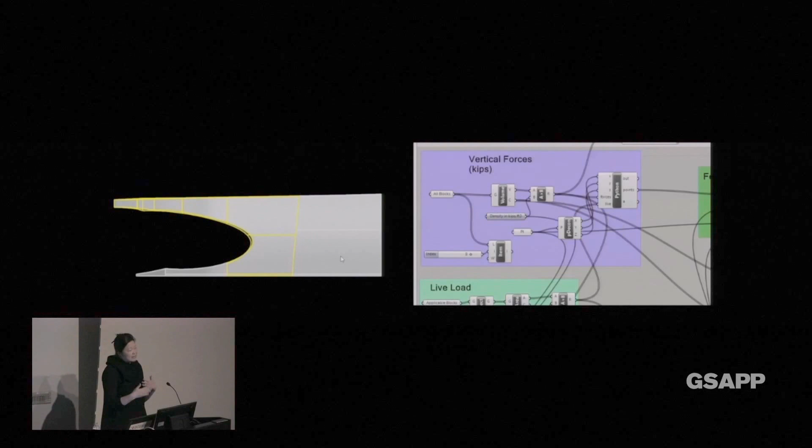So John's team developed a little applet for us, which allowed us, as we were designing, to calculate the weight. This is the force line. Every time that red line comes out of the volume, it fails here. And every time it terminates before the one-third point of the last block, it also fails.

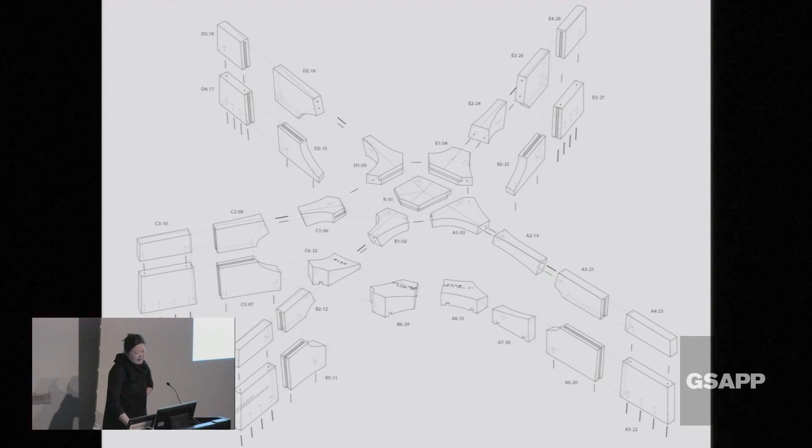So we were able to use this tool to modify the geometry according to all the parameters on site, and then divide the form into 32 blocks. The blocks come from a quarry in Virginia, close to West Virginia. It's kind of amazing, the amount of volume of materials and tonnage of stone.

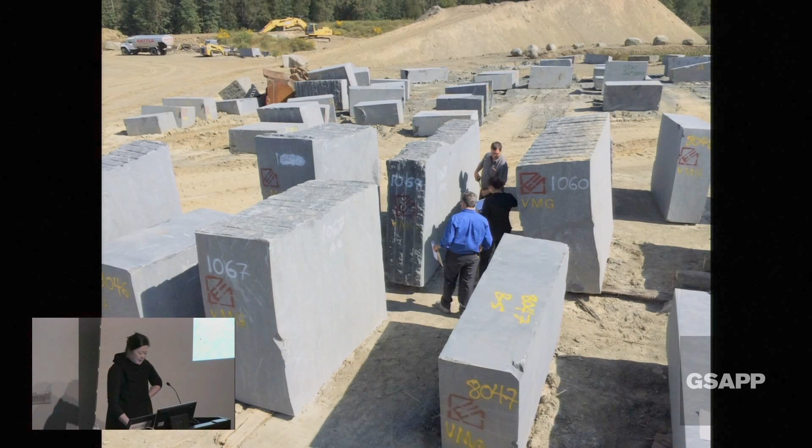Each of the blocks weighs somewhere between—the smallest is about 7,000 pounds, and the largest block weighs about 22,000 pounds. And we were able to, just by having our laptop there, utilize and select blocks that might have fractures or imperfections for kitchen counters, but work quite well for the memorial.

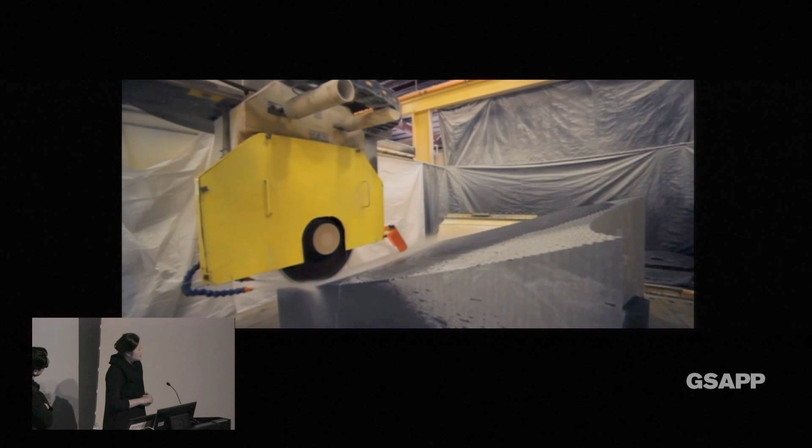Again, we couldn't find many people who were willing to fabricate this for us. So we ended up working with Quarra Stone out in Wisconsin. They had basically the right equipment—we needed CNC saws because the process was literally a subtractive one, that we were going to just be removing material and carving these blocks of stone.

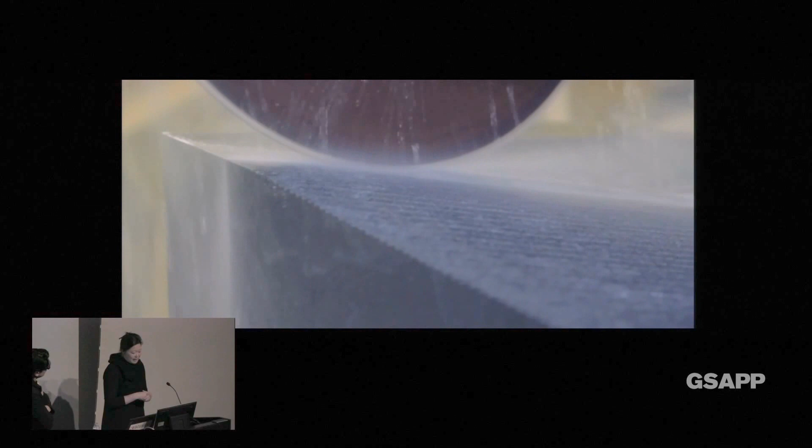Some of these blocks take about 7 days, running 24 hours, these machines, to carve. So we thought, we have all the tools available to us—we have computer models, we have CNC machines. This will be a piece of cake. Well, it had some challenges.

One of the ones that we weren't so aware of initially was the fact that we use material to carve material. So these blades would actually wear, so you can imagine that, over the course of 7 days, 24 hours a day, the saw blades themselves would wear, which meant that there was always going to be an imperfection between the computer model and the final blocks.

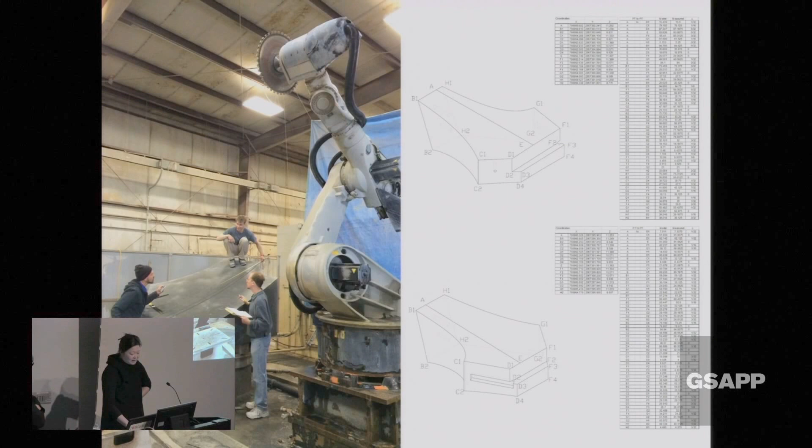So we had to develop a kind of quality control system, our own version of the shop drawing process, that basically measured every point to every point when the block was finished. And if we were over a certain metric—we used 2 millimeters over or under—we would make an adjustment in the next block, and it would kind of run in sequence like that.

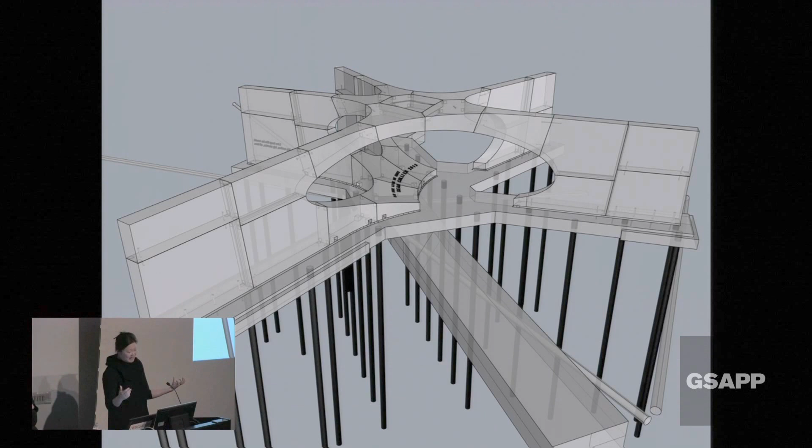So the memorial is about 190 tons of stone, and it sits on 35 piles that go about 40 feet below grade. What you're seeing here is a major duct bank at MIT, where all the power and data come into the university, and of course we have 190 tons sitting on it. So everyone is really sensitive to this site and any concern for deflection.

We were able to develop techniques, with some small steel dowels for lateral redundancy. Because our computational models in structural engineering are very biased towards steel construction, we weren't able to calculate and simulate, so we had to do a lot of our own testing in the civil engineering lab about how much compressive strength there was in these blocks and the grout between them.

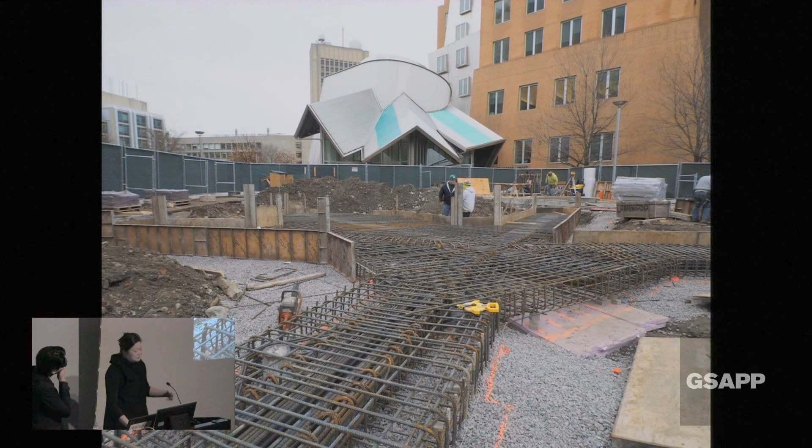The steel in the foundation is pulling it back together, and these are some of the blocks as they would come in sets of 3 from the fabrication facility in Wisconsin to MIT every couple of weeks. That's the keystone coming in, and it snowed 109 inches that winter.

What's interesting about this project for us was that it was always a test, always an experiment. So what you can see here are these giant 10,000-pound scales. The reason there are scales is because we installed on top of the scaffold, assuming a certain rate of deflection and compensating for that, but not 100% sure where that deflection would be or what the number of that deflection would be.

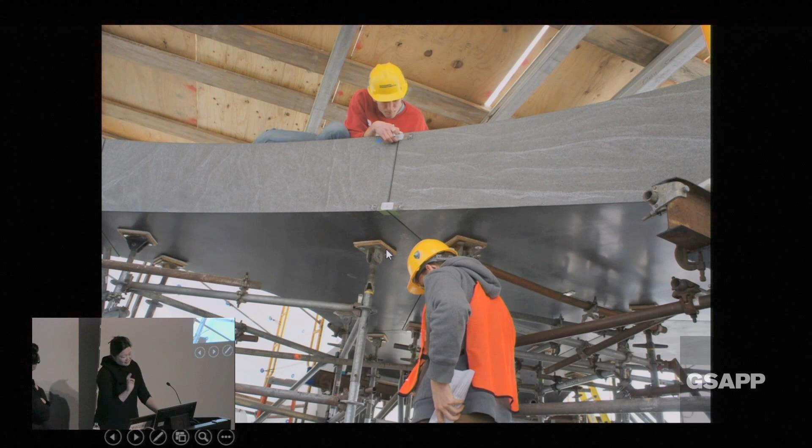So every joint had a strain gauge associated with it, and the top of these scaffold points would allow us to turn and lower the memorial by a fraction of a millimeter every time. So that's the strain gauge, and then it was sitting on these giant scales which were hooked up to a computer and measuring as we lowered the scaffold.

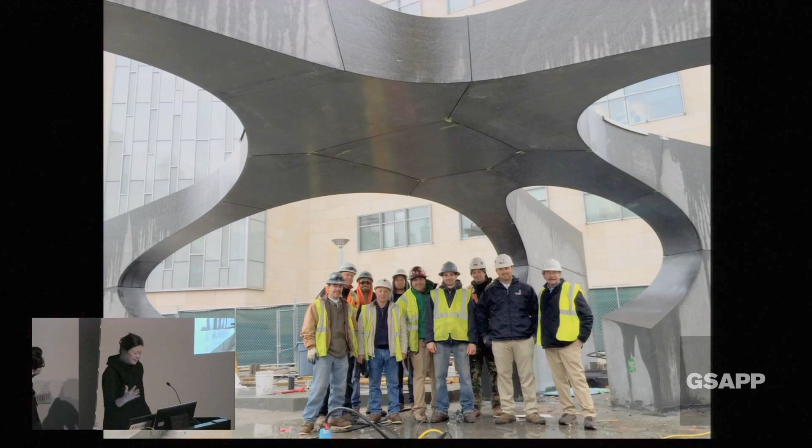What was amazing was it took, I don't know, 8 hours and 30 people turning these dials by a fraction of a rotation. 8 hours to see this thing not move at all, which was the huge success of the project. So it did move about 6 millimeters, and 96% of the loads were transferred into the legs, and then we grouted. The subcontractors and masons were so excited to finally stand under this structure they had been working on for many months through the most brutal of winters.

The exterior is thermal finish, so it's lighter in color and rough, and underneath it's high honed, not quite polished, so it has a little reflectivity. That parabolic curvature really plays with sound, so when you're underneath it and you talk, it echoes and rolls down. There's the 5-pointed figure, a series of point lights in the ground plane, and it's very porous, used now as a kind of everyday space at MIT. It's very open from certain vantage points, but can also feel very intimate.

There are only 2 places of text: one under the dome, and the second location is in the 2 arms facing where Sean was shot. A simple quote from Sean's brother: 'Live long like he would, big hearts, big smiles, big service, all love.' It's remarkable how the community received it, and also the extended community of police officers all across the state.